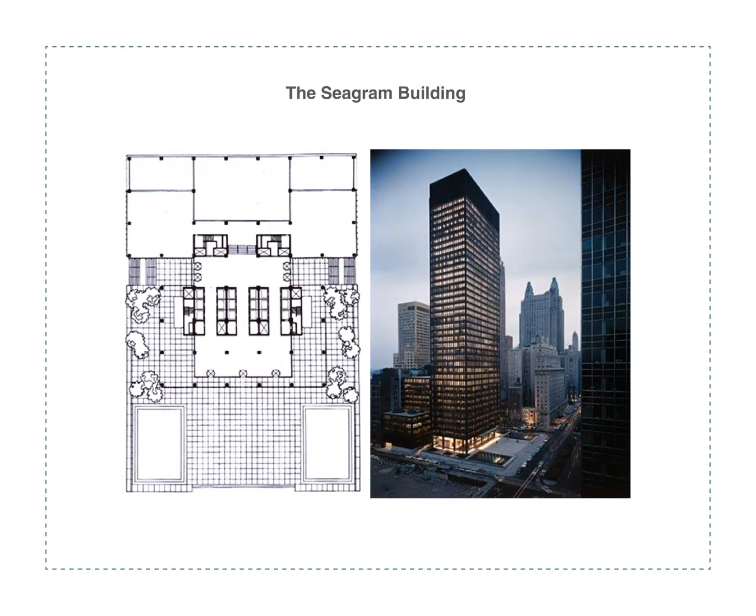There were a few exceptions, but they tended to be in buildings that were exceptional in other ways too, like the Seagram Building - the great American monument of the sleek and cool forms of the international style. The entrance of this building has a tall, column-free lobby, completely open, which creates a good connection between inside and outside. This lobby is also bright and flexible.

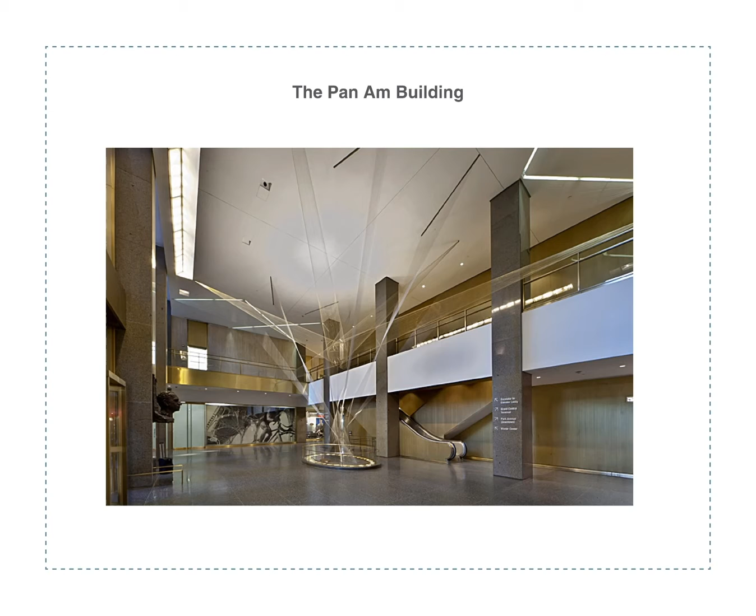The Pan Am Building has a prominent and tall lobby to handle the heavy crowds that pour into the building, serving a different architectural experience - the open lobbies.

Central Park is the largest and most important public park in Manhattan. It incorporates a variety of landscapes and experiences. This artificial park consists of different functions, and besides its recreational facilities, it creates great ecological and environmental benefits for the city.

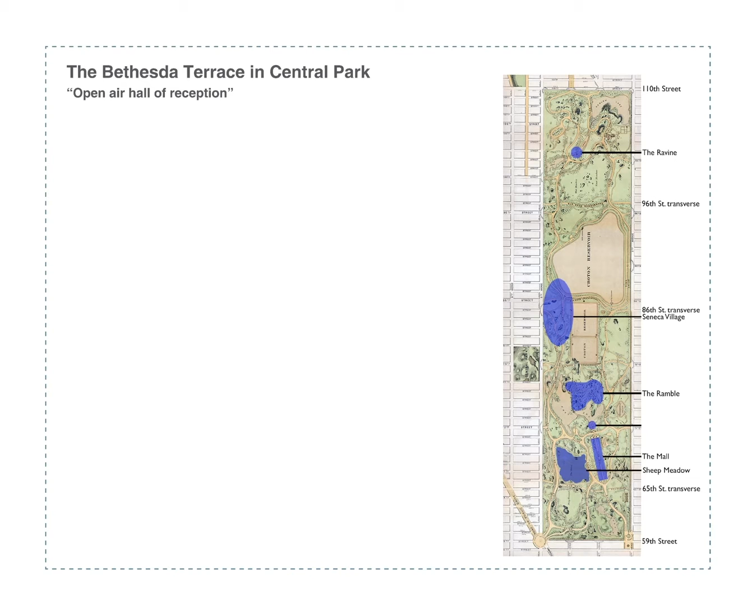The Bethesda Terrace open-air hall of reception is the heart of the park. This terrace was intended to be the main structure and social hub in the park.

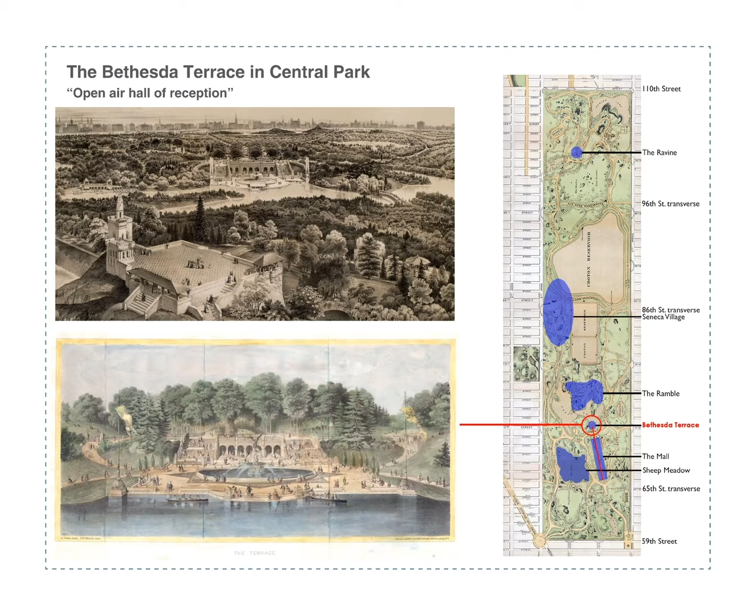Visitors would arrive there after strolling north along the elm-shaded walkway of the mall. The mall in Central Park is the only straight line in the park's design, intended to prepare visitors for the grandeur of the terrace. This gradual transition between naturalistic and formal design was important to its designer.

Below the terrace is the softly lit arcade, a colorful atmospheric space, not fully indoors or outdoors. The arcade was conceived as an open-air reception hall that would provide visitors with shelter from rain and heat.

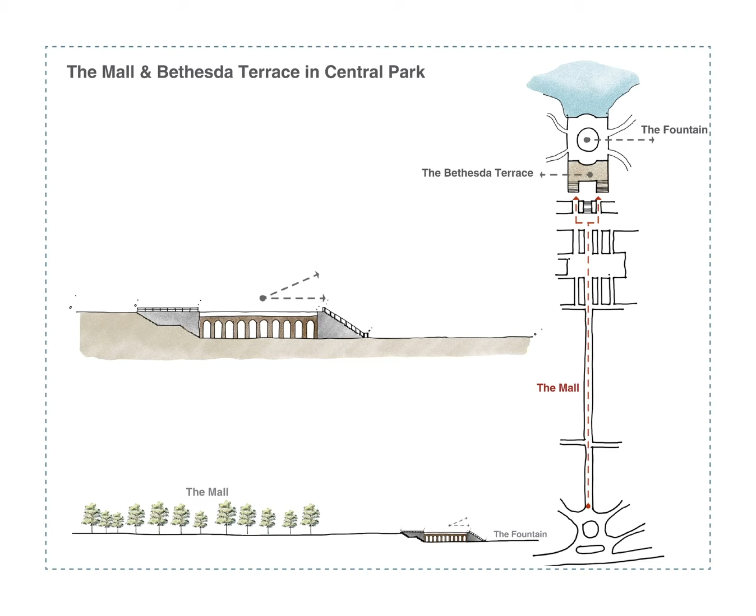The arrival sequence gives a better understanding of the space and creates a sense of anticipation for what lies ahead, as its designer said: nature first, second, and third - architecture after a while.

Hyde Park in London is the largest of the 4 royal parks. It was opened to the public in 1637 and quickly became a popular gathering place.

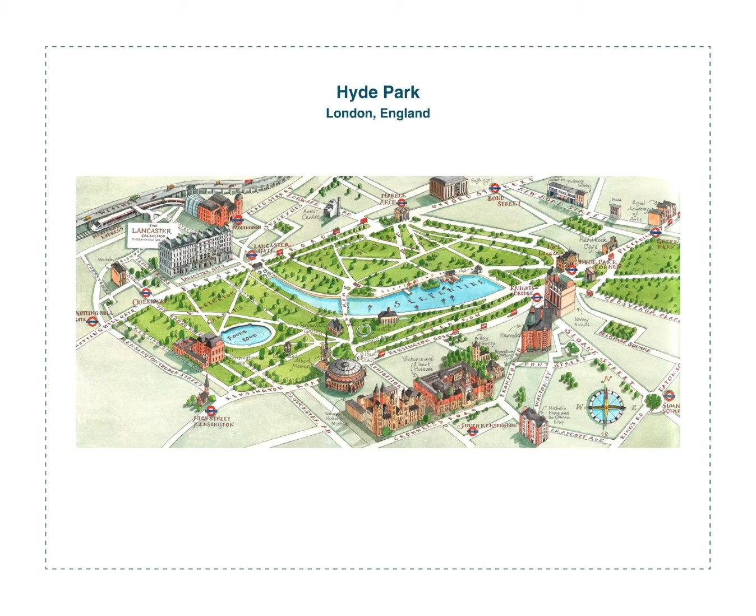This park is like a chain from the entrance of Kensington Palace through Kensington Gardens and Hyde Park, then to Buckingham Palace. The idea of a lobby can be seen in the Apsley Gate, through which many visitors pass from Hyde Park Corner to Hyde Park. The archway passage from Wellington Arch to Apsley Gate is a kind of arrival sequence.

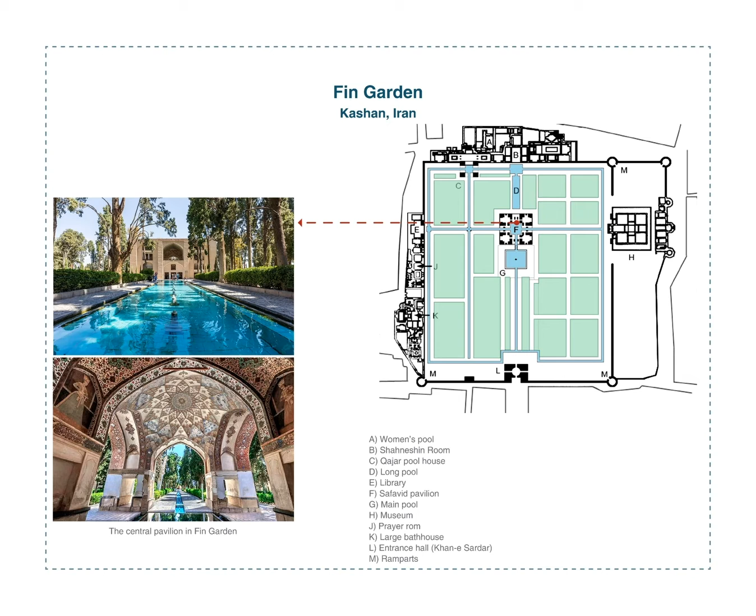Persian Gardens: Fin Garden in Kashan. The arrangement of spaces at Fin Garden corresponds to its main use as a recreational, reception, and residential space for kings, ministers, and other high-level officials.

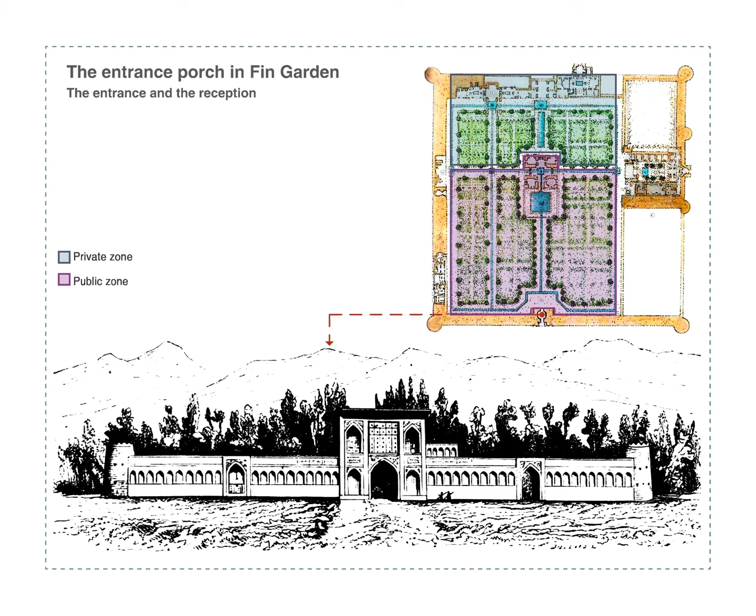The entrance porch was built on 2 levels. This building is important due to its presence in the geometric and pure space of the garden on one hand, and its functional role - entrance and reception - on the other hand. There are 2 different zones, public and private, which create various qualities and functions.

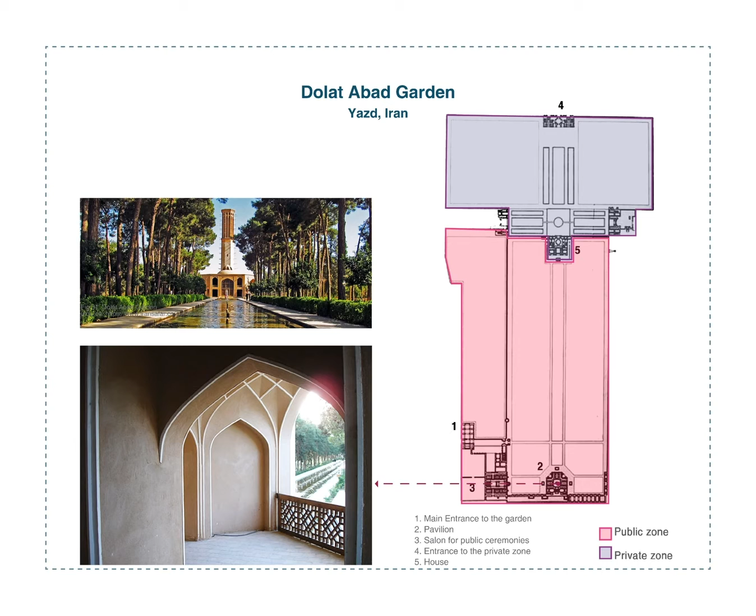Dolat Abad Garden in Yazd is divided into interior and exterior areas. It is a residential governmental garden. The interior of the pavilion is superb, with intricate latticework and exquisite stained glass windows.

Shahzade Mahan Garden in Kerman, with a rectangular shape surrounded by a wall. The range of colors in the Persian garden is very limited - the colors of the garden are taken from the environment. The structures and architecture of the garden are the same color as the surrounding environment and are created with vernacular materials.

Site location: Goose Island, Illinois, Chicago. This island is in the north branch of the Chicago River on the north side of Chicago. It has a long history of being an industrial corridor.

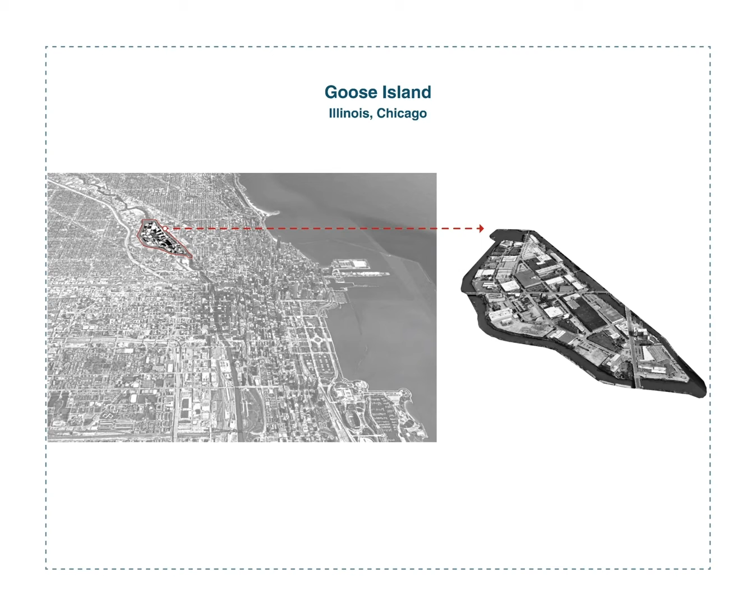The architecture typology is changing from high-rise buildings to low-rise industrial buildings and warehouses. However, this island is located at the central part of Chicago's loop, but it seems lost and disconnected from the city. At first, the history of Goose Island is reviewed to study its formation over time and find out what parts of the island are older and more important, because it is a very important factor affecting its future development.

The future for Goose Island as proposed by the city until 2050: some of the buildings in Goose Island have the opportunity to be reused. Balancing the past and future is the contrast that makes repurposing an old structure so unique.

From my perspective, there is no collective or interactive space on the island. It is an obvious defect in such an island of good location and great history.

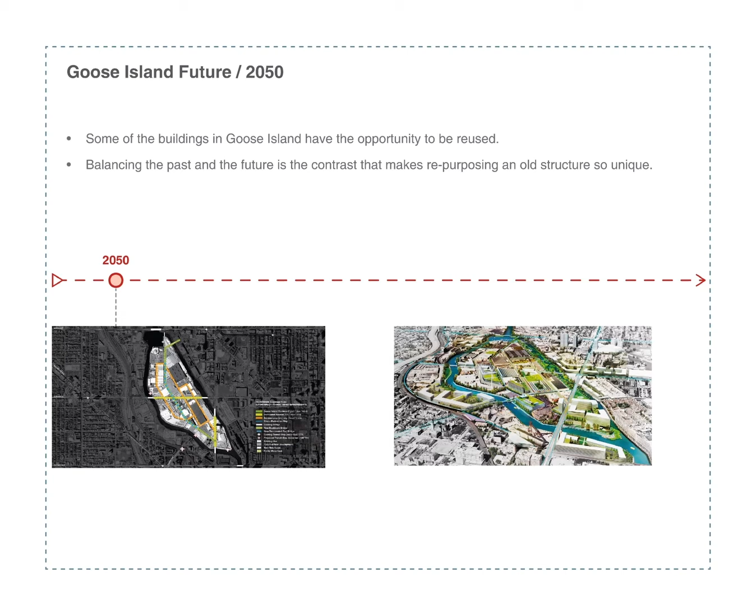Design process. The main idea: converting Goose Island to a Chicago's lobby. Design an arrival space reception area that has a non-programmed function, to create a spatial opportunity for a range of activities rather than being built to serve a specific function, besides keeping the industrial function in the island.

The arrival space is made up of memorable moments that create a sense of anticipation for what lies ahead, and it consists of various meaningful visual moments, which are considered an important part of the design.

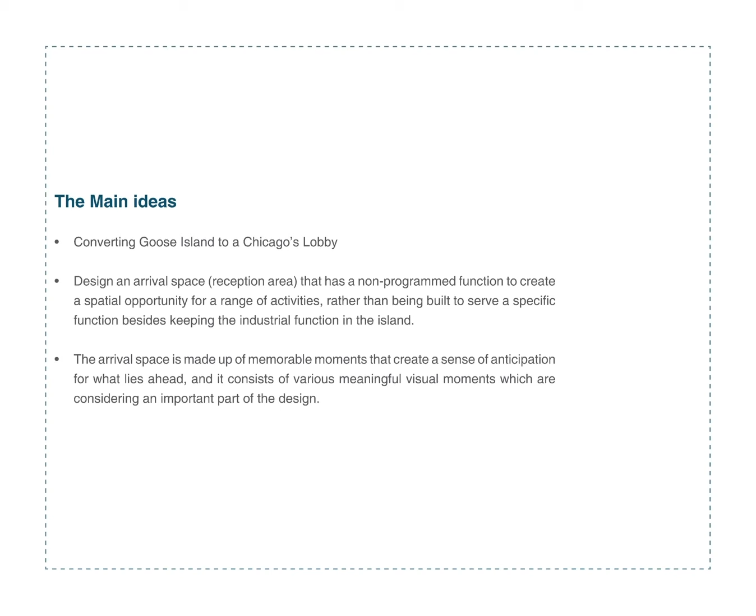A strategy: introducing walls into Goose Island to create new boundaries, and bringing another wall within that wall to create different enclosures and diversity to the island.

Those old industrial buildings become arcades, shelters, and reception areas. Considering the pedestrian pathway networks as one of the basic layers for new development on the island.

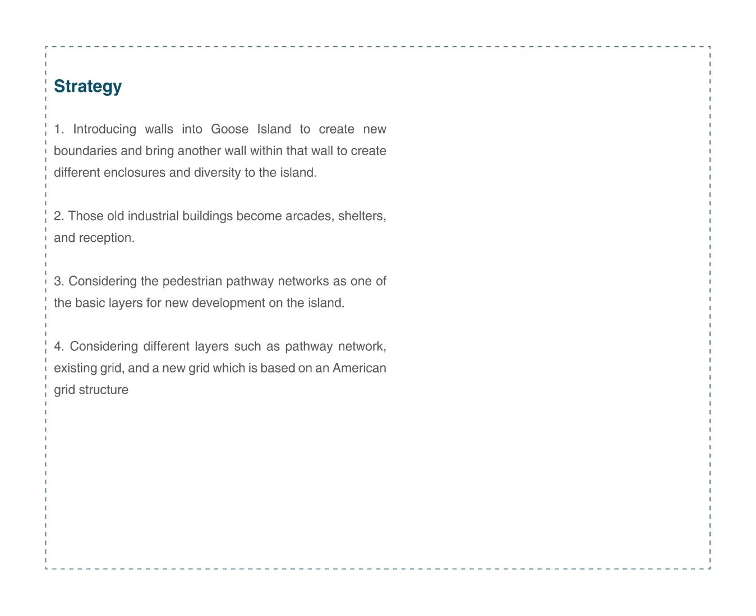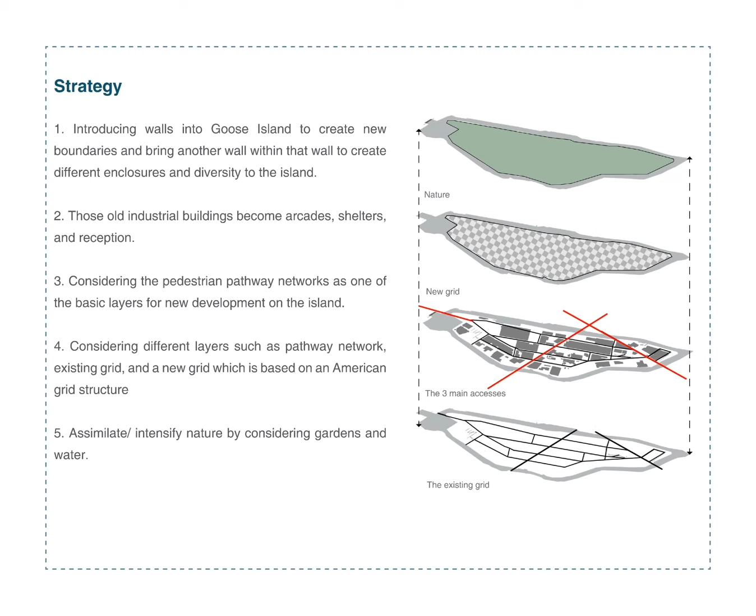Considering different layers such as pathway network, existing grid, and a new grid based on an American grid structure, assimilating or intensifying nature by considering gardens and water.

The American grid structure was used as the base layer. In Chicago, a typical city block is 100 by 200 meters, meaning there are 16 east-west blocks and 8 north-south ones along the width and length of a 1 square mile grid, the typical grid of Chicago. The actual grid was simplified, and the rectangular city blocks were changed to square ones.

The reason is that both shapes represent stability, but there is an equal division in a square.

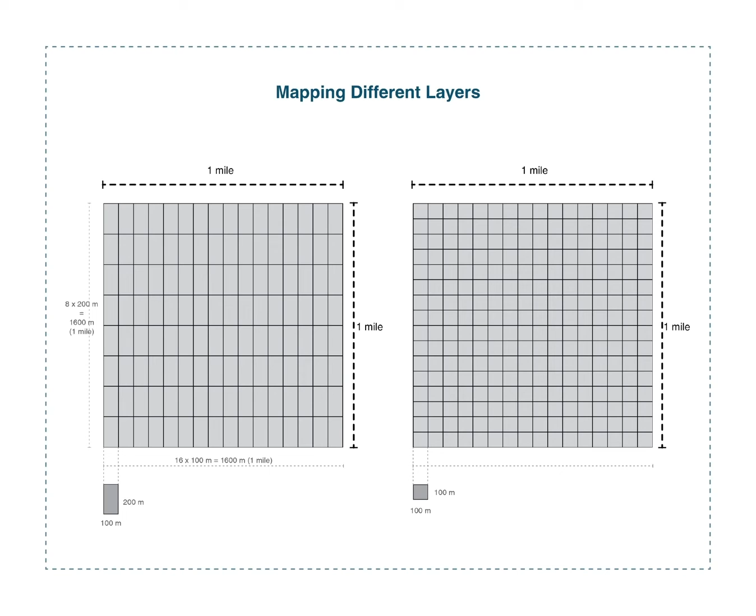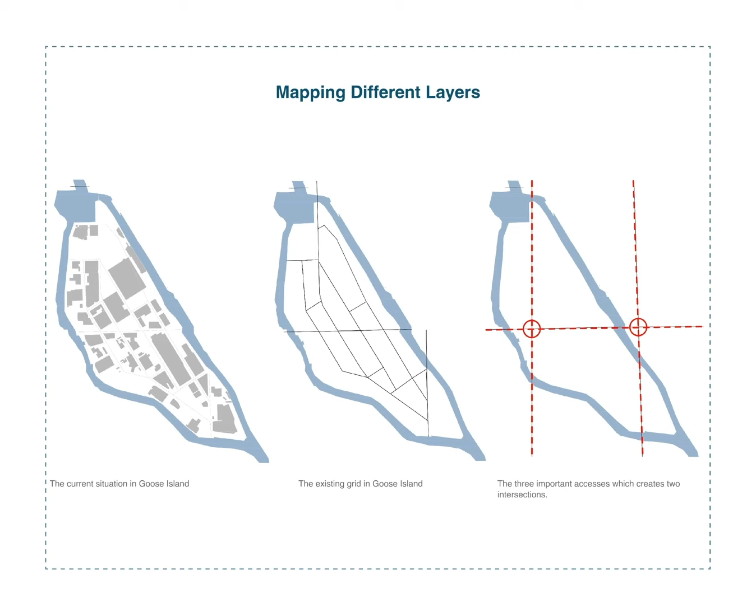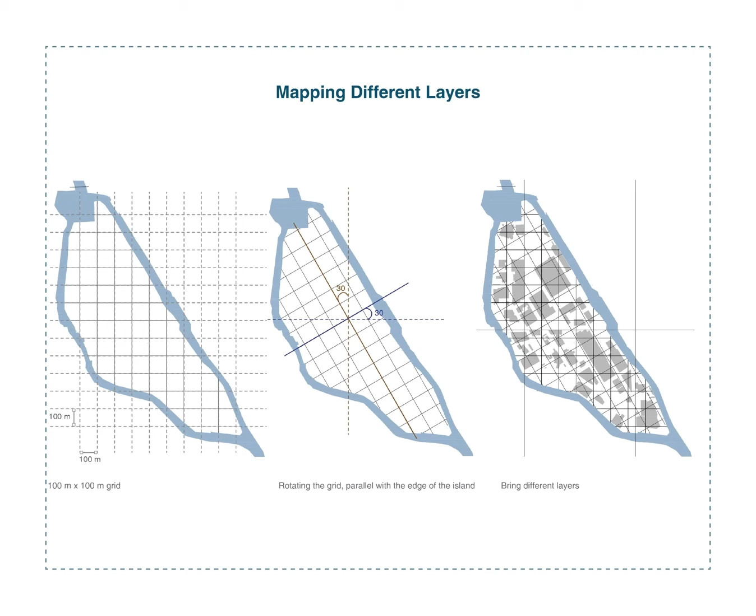In this mode, when different layers are put together, the old industrial building structures can be maintained. Different layers are brought together to find the merged plan.

Design proposal: the existing buildings on the island are maintained based on the merged plan. Two important intersections are chosen for the location of the two main reception areas, or terraces.

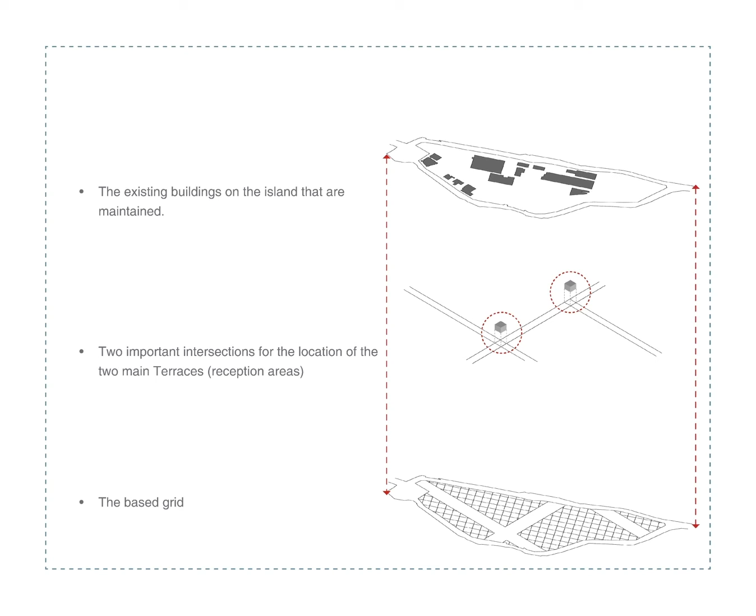These terraces are designed to create a collective space that welcomes people to the island. The terraces at the two intersections are connected by walking bridges, arched pathways, and stairways connected like a chain all over the island. The paths were designed differently.

Turning a monotonous path into a pleasant space to experience various settings, these routes include flexible resting and sitting places.

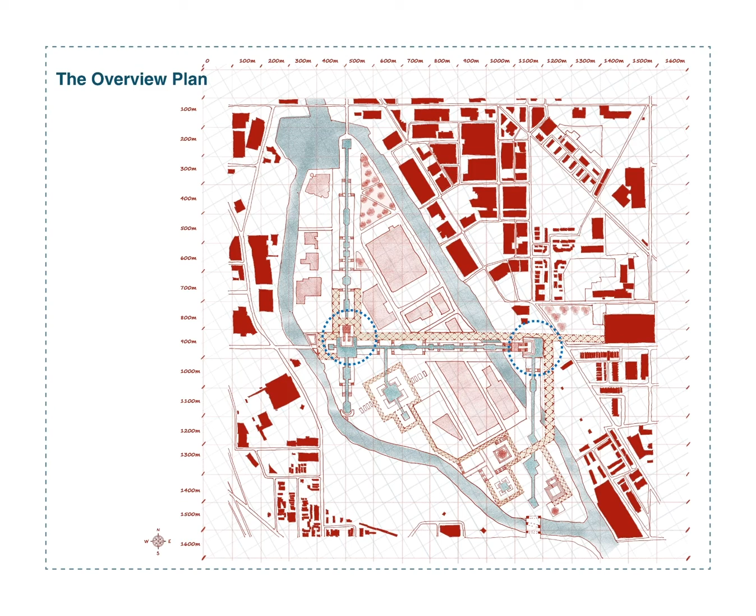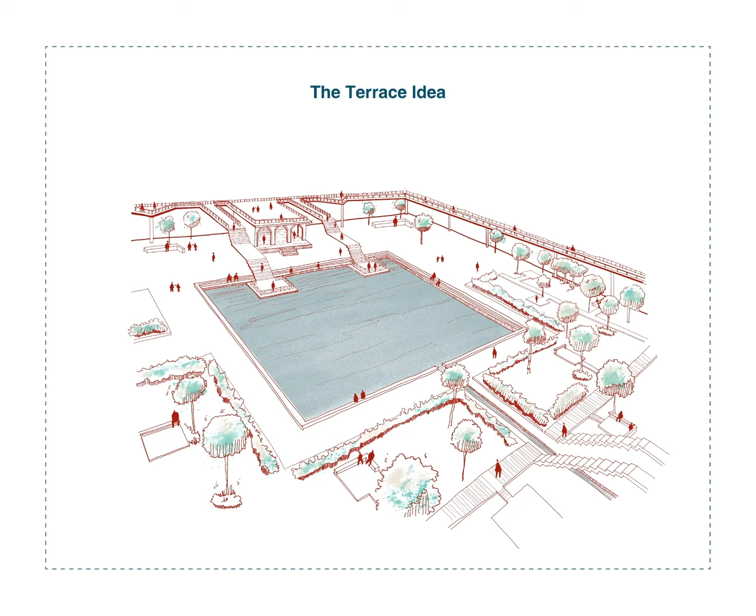The first imagination behind the terrace idea in this design was to create a livable, non-programmed space connected to the surrounding environment. The circulation in the space is the fundamental factor for designing it.

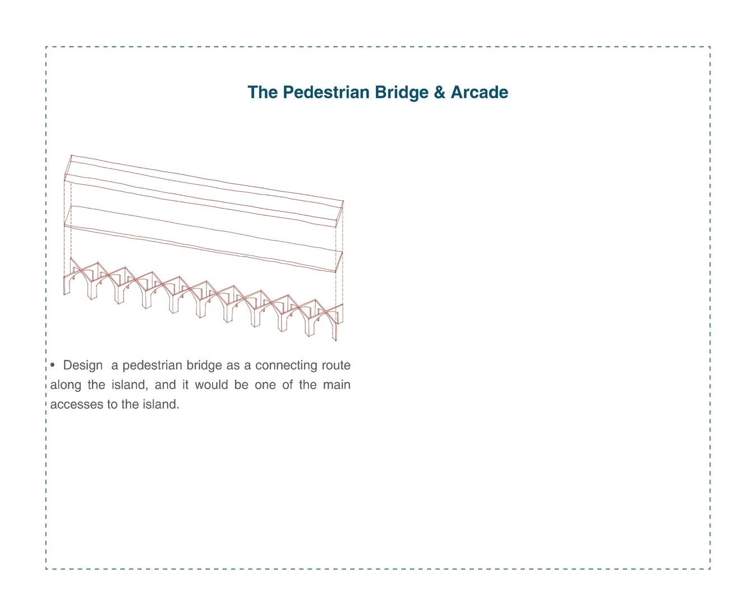The pedestrian bridge and arcade: designed as a connecting route along the island, it is one of the main accesses to the island. Considering the arcade path as a bridge structure also makes the space under the bridge livable and active.

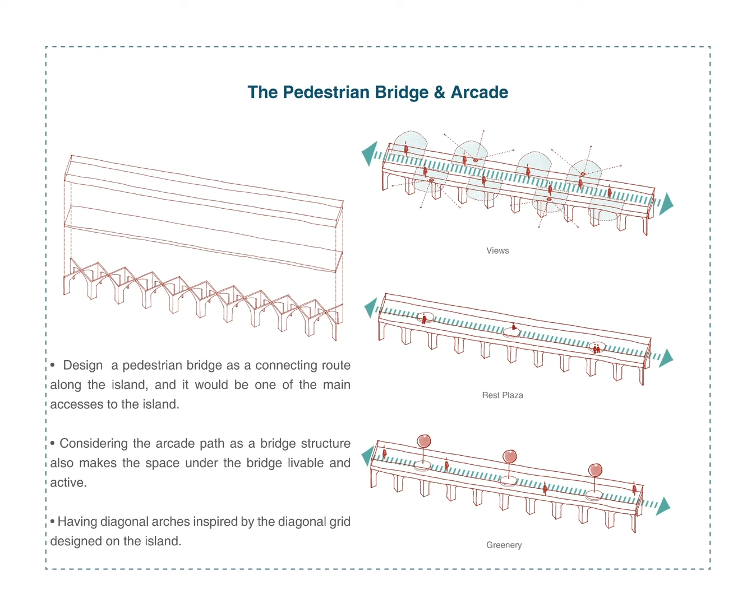Having diagonal arches inspired by the diagonal grid designed on the island, there are possibilities like greenery and a rest plaza along the bridge, creating a different quality of views for visitors.

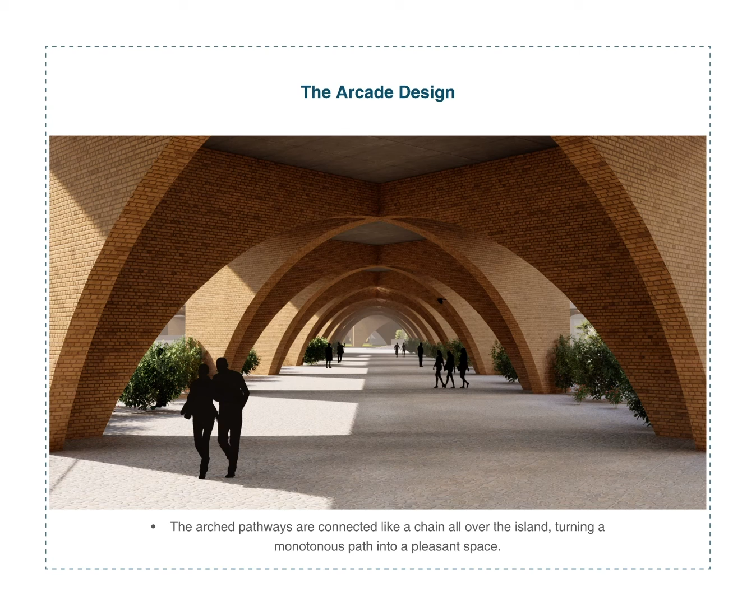The arched pathways are connected like a chain all over the island, turning a monotonous path into a pleasant space. The arches frame the surrounding nature and the fountain in the pedestrian bridge.

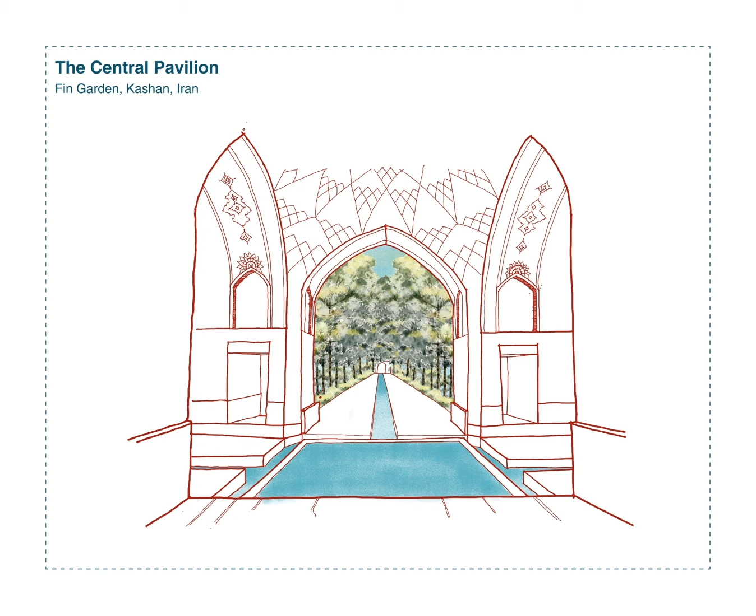In the central pavilion of Fin Garden, there is the same quality of space as the pedestrian bridge, with connections between the spaces and the surrounding environment, while providing shelter for people.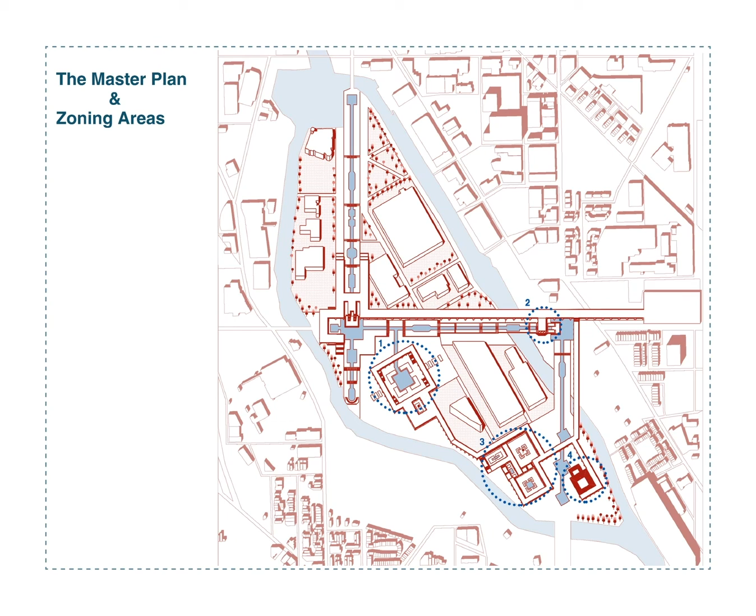Different zoning areas are highlighted in this master plan, and the following pages present these zoning areas. Users will experience a different quality in these places, moving from a closed space to an open one without limitations, enjoying the natural environment, and sitting near the water or in the green space.

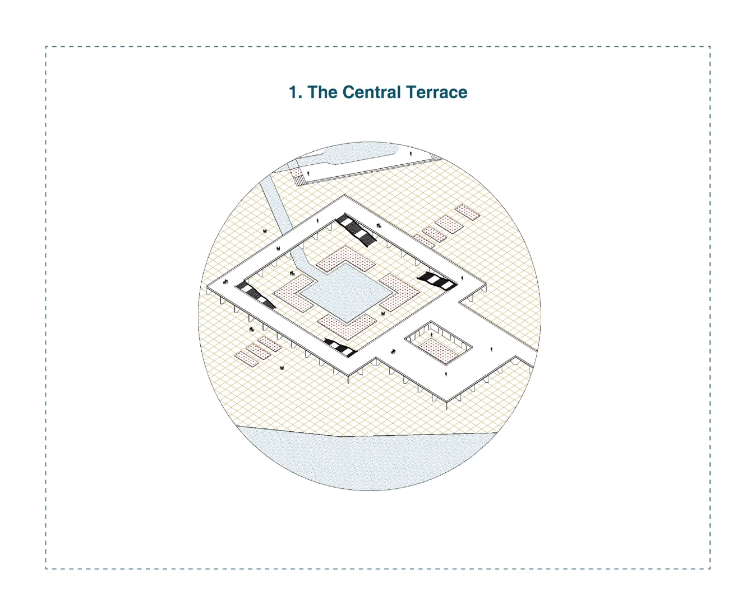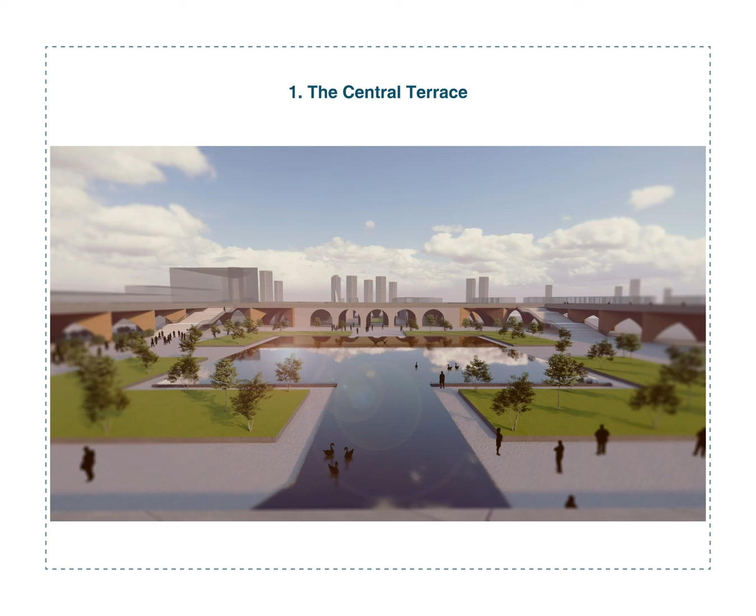This terrace was designed in the central part of the island, once the site of the island's first residences. Here, a special variety was added by creating shelter and a non-programmed function connected to the adjacent natural environment and water, along with circulation through a bridge and arced pathways around it. The arcs frame the surrounding environment while providing shelter for people.

In the Shahzade Mahan Garden in Kerman, a 300-meter stairway connects the main entrance to the building at the end of the garden, providing users with various sensory and spatial experiences.

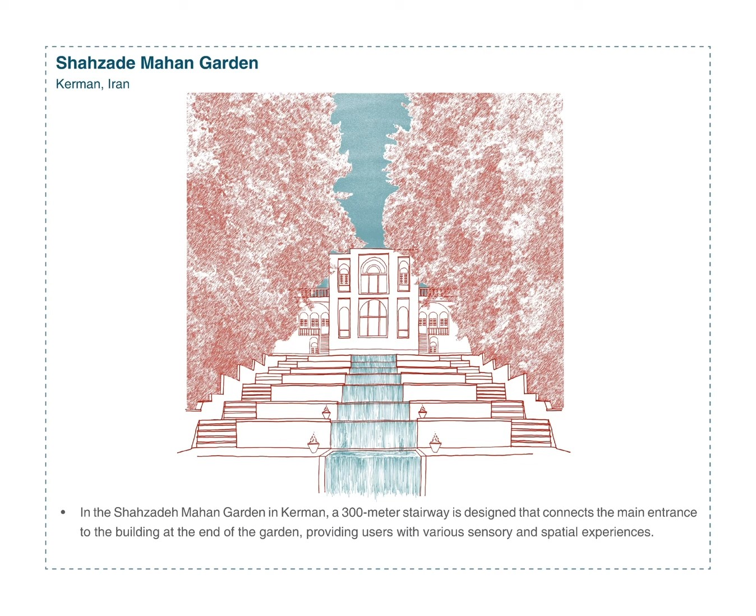The East Terrace was designed at one of the main intersections on the island. It acts as a reception area for the island, also working as an entrance gate to the east side.

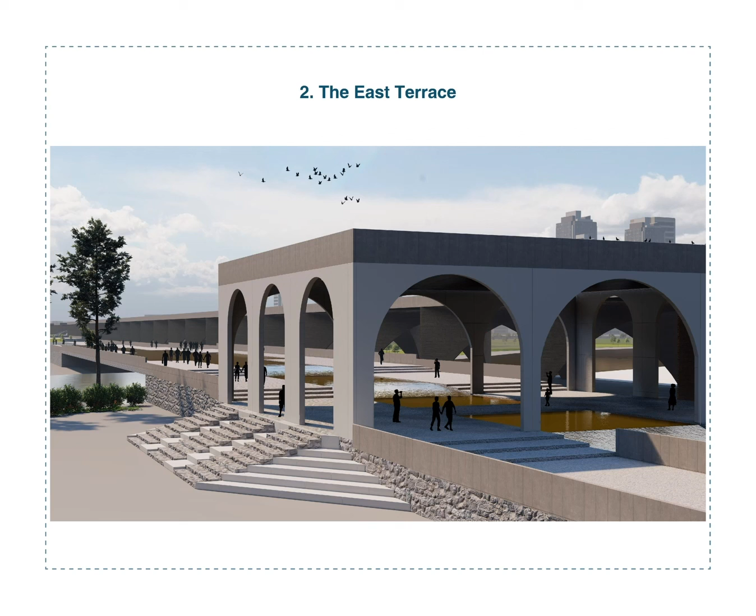Precast concrete panels are the main material for this terrace, while the stepped pathways use local rocks stacked with concrete, and red brick for the arcs.

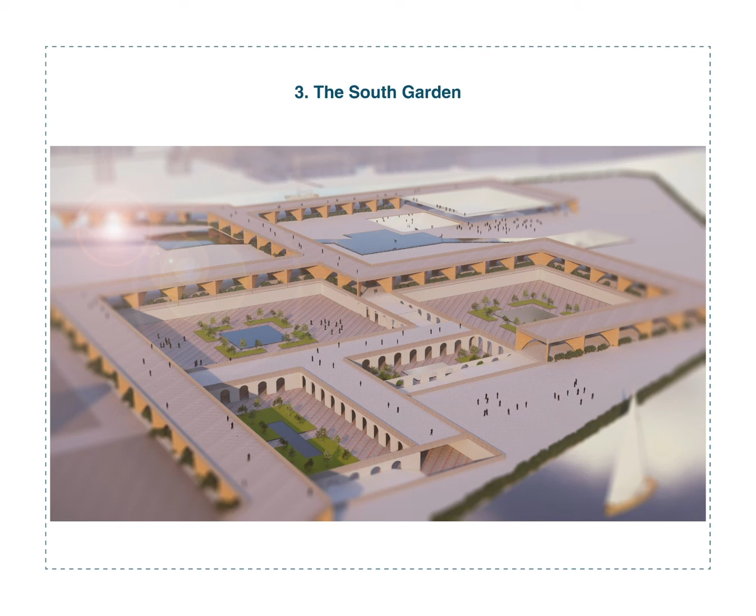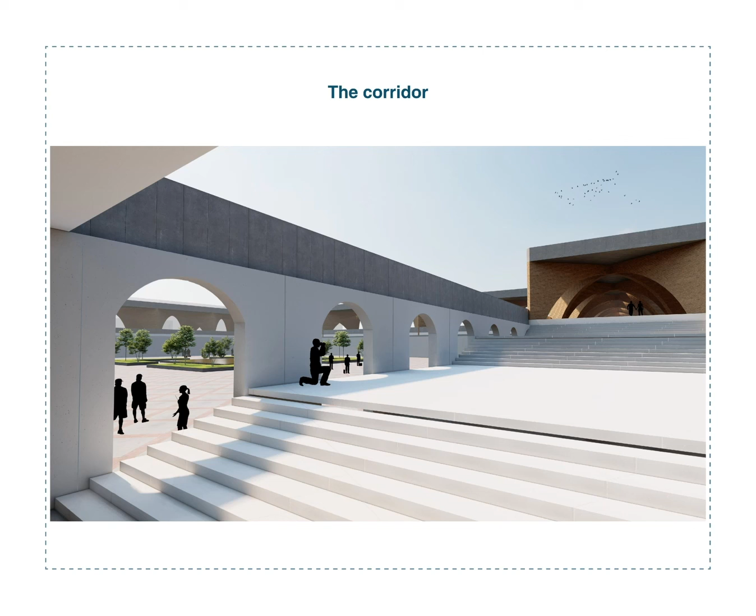The South Garden is designed below ground level, without making visitors feel they are underground, creating various experiences of being in a reception area and bringing diversity to the island. In-between corridors connect the arcades to different levels of gardens.

The South Terrace is designed by creating an inverse, overlaid square-shaped space that is flexible and adaptable to any requirement in the collective space—one part an observation deck and stage, another a sitting area. These varieties create an environment that encourages visitors to explore and spend time in different spaces within this industrial island.